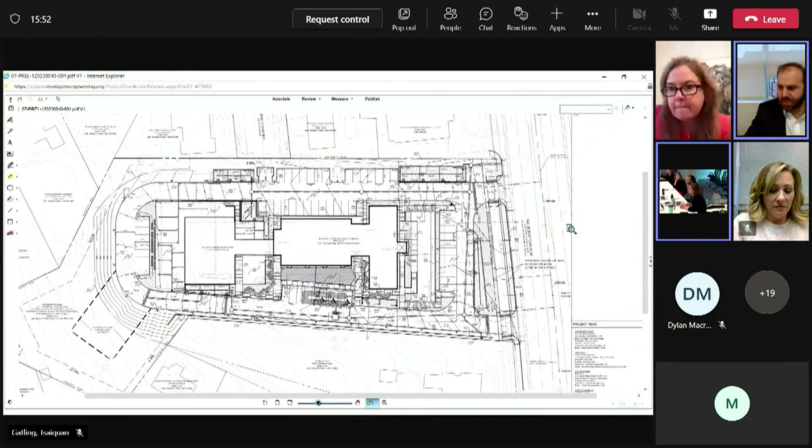I am Christina Sorrento, Chief of the Intake and Regulatory Coordination Division, and your lead reviewer is Isaiquan Gatling. The purpose of this meeting is for the applicant to ask any questions based upon the comments received last week. I'll ask Saquon to highlight the major issues, then turn it over to you for your meeting. This meeting is being recorded and live streamed.

Go right ahead, Saquon. Thank you, everyone. Isaiquan Gatling here, your lead reviewer for the Diener School Preliminary Plan. Just to lay out some key comments: there were scheduling concerns to make sure we have everything in line with the conditional use, which I can discuss near the end of the meeting when we get to schedule and resubmittal dates. Another general comment is that we need to pursue abandonment of the special exception for the existing use on site.

Getting into the planning comments, there were comments regarding the potential phasing and how we can come to agreement to work with that constraint you have. There were also transportation planning comments regarding the master plan green corridor and pedestrian safety, as well as ADA compliance and pedestrian level comfort concerns relating to cost estimates and things of that nature.

We also had comments regarding showing street lamps on the site right of way. Environmentally, there were comments for clarification regarding landscape plans and forest conservation plans. From outside agencies, we had comments from DOT regarding queuing and congestion, making sure we study those as well. There were also SHA comments regarding bike lanes and storm drain connections. That's a general overview, but we can get into those details as we discuss today. I'd like to open it up to you guys.

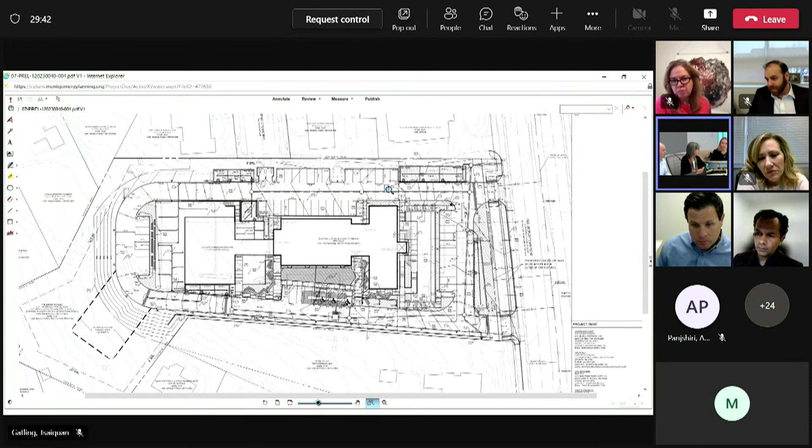That is it. Would I be able to share my screen? Sure, if you join the meeting, but mute your computer. Okay, if I could do that real quick, then I've got a few.

While you're pulling that up, in the conditional use package we included a phase 1 drawing. We did not include that in the preliminary plan, thinking the preliminary plan was just showing the full build out of the campus, but we can certainly add that to the preliminary plan set and bring it up if needed.

In looking at the phase 1 and phase 2 drawings, I think it was noted in the comments that there was a lot of changes being proposed in the front of the school. So some of the sketches we were proposing were illustrating some ways in which that change can be more incremental.

Where the loop is currently, as can be seen on the image on the right, you're showing some bus drop-off spaces in phase 1. We think that's okay because you have secured gates towards the back of the property where some car parking spaces are. But we were simply suggesting that maybe those bus drop-off spaces can be more like parallel drop-off spaces as opposed to head-in or back-in drop-off spaces as shown on the phase 1 drawing. This would limit the amount of pavement you would need.

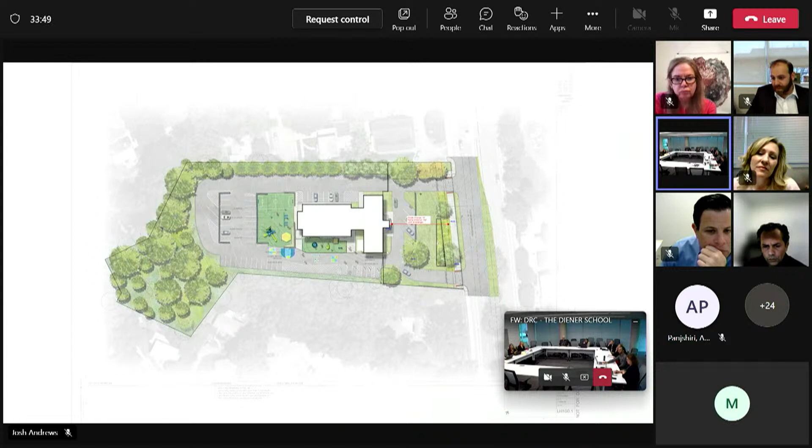To be honest, when we've looked at the ADA access from a ramp standpoint, in this current scenario, we have a real challenge of doing the ramping and having it be in the way of what we planned for phase 2.

We've spoken - let me go to phase 2. Remind me what the enrollment is that you have for phase 1. Currently there are... you split it, 72 students, and then the maximum we're using for traffic purposes is 120. Okay, the maximum the school actually expects is 100.

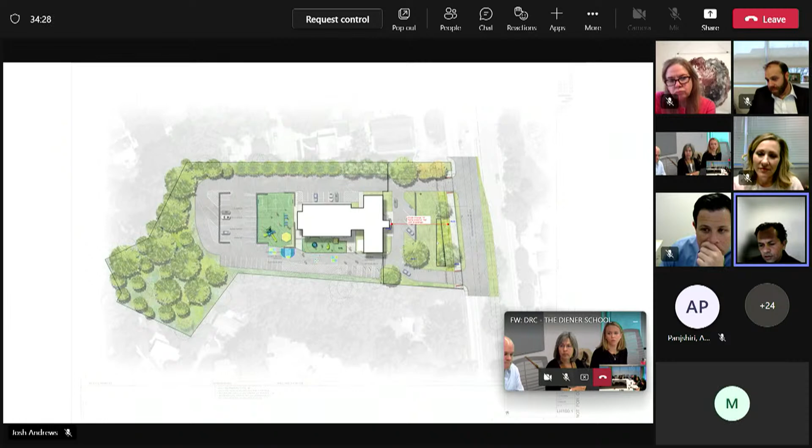Is there an existing conditions aerial that could be pulled up? Because this image shows a lot more parking in the front than what's being shown on the drawing, and I think you're maybe adjusting some things, maybe not all things - it'll be helpful to see that. That's right, maybe you can see right here.

Yeah, that's right. Several of the improvements we were including as part of phase 1 in the right of way was what was being shown. So we were trying to do what was required to meet the criteria for the county, but not going beyond that for this initial phase.

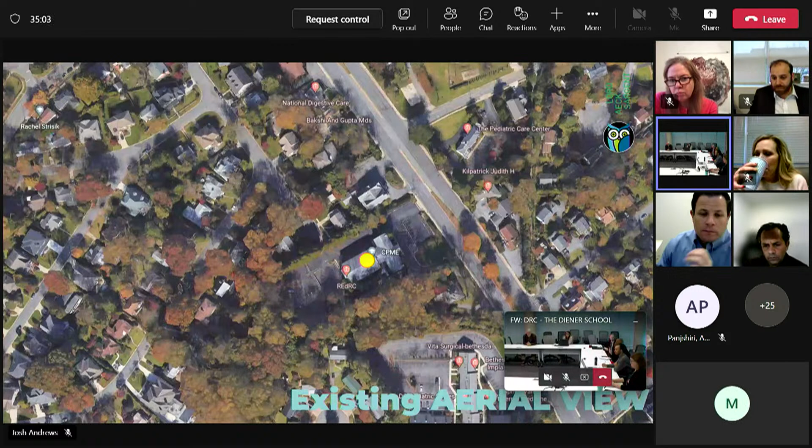Taking out the lower - yeah, in order to put in that side path you see there, effectively we need to grade back and eliminate that first row of parking that's there today. So that's why that all disappears. It's all grading and so forth to accommodate the frontage improvements.

Our only comment on this phase 1 condition would be, do we really need those parking spaces that you are leaving in the front? Could the buses simply use that loop to drop off people? Or cars could use that loop to drop off people in more of a parallel parking situation. So most of the parking, even in phase one, is really limited to the back of the school.

I'm told those are not intended to be bus spaces. Those are spaces for visitors. So buses aren't going to drop off in the same loop with everybody else, right, Kate? No, the buses will use that front loop for drop off, and part of the reason is really to just facilitate queuing.

We understand that we're on Old Georgetown and we can't have queuing on Old Georgetown. So it's to have those two areas of drop off, one separating the buses and one separating the vehicles. So you're suggesting the cars would park in the angled spaces and the buses would drop off in a parallel configuration? Yes, and the buses are not stored on campus. So they drop off and then leave.

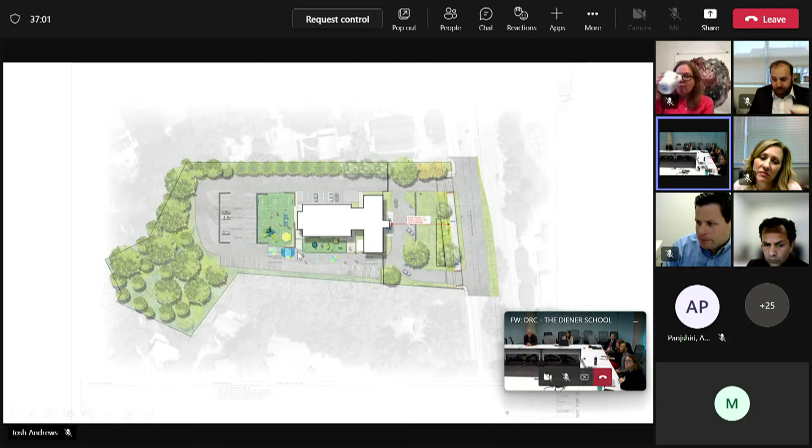Here is where our conversations have gone in terms of phase two that we're showing here. There was a lot of concern around the outdoor space that can be secured, that teachers can and parents can feel comfortable with the students being somewhere. This is an interesting property because you come in at the entry level to this building at the mid floor. So the entry to this building is at that center floor level.

So right now, what we have is the outdoor play area, even in phase one and then in phase two, it's all starting from that elevation and moving on from there to be able to deal with it from a security standpoint. What this was showing, Atul, was looking at the notion of having this raised zone that's roughly at the same elevation as the entry floor, maybe a little bit lower because we've got some ramp to get in there, but that this could be contained so you could have teachers out there watching, but they're closer to the building.

There's no interaction with potential traffic. You're not having to go across a drive aisle or be close to a busy street. So that's what the strategy was there, to be able to provide as much real estate as possible - and there's not a lot - of outdoor space that could be accomplished.

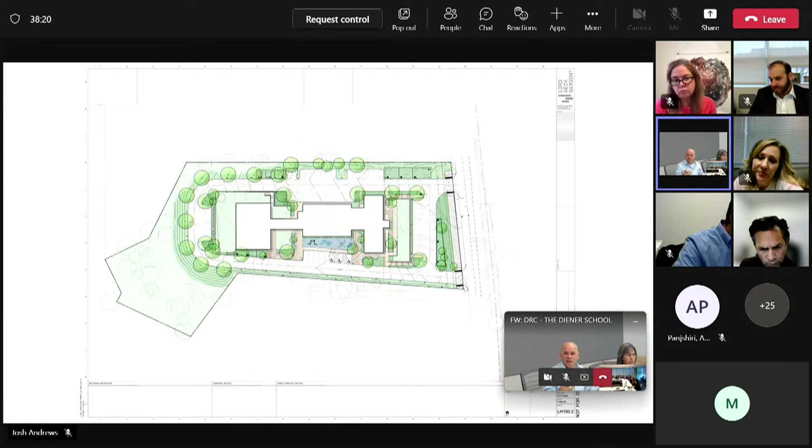The way I was understanding that, if this green area - and I'll zoom in a little bit more - if this area starts to move out into this zone more, I think the school's probably just not going to use it because they've got to go across a drive aisle that is still in the public realm, versus what's in the private realm of the school that they can contain. So that's one of the things we've been trying to look at relative to thinking about the phase.

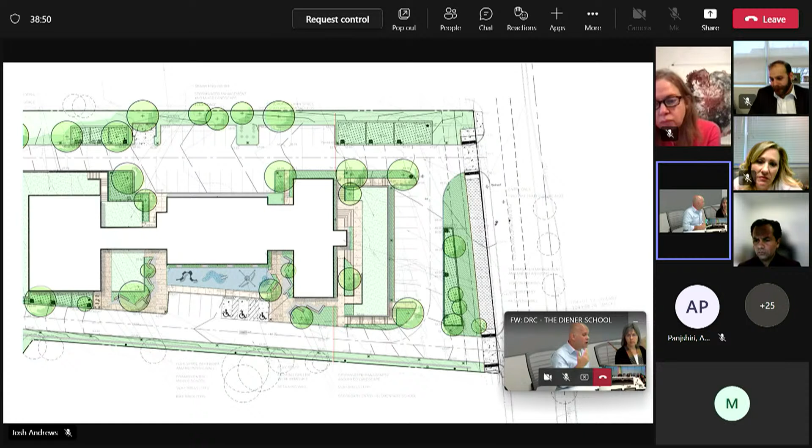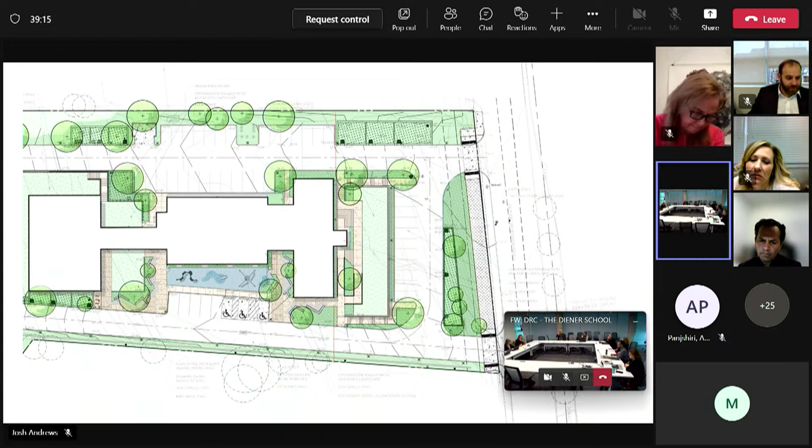I think if you take it up a level higher, get out of the detail of it all, what we're trying to say here is in the CR zone, we do not want a parking lot facing the street. So right here, you're having a parking lot face onto the street. The diagrams that we showed had parking sort of off to the side, so the parking would be on the side rather than in the front, facing the street. That's kind of the big overarching comment.

And then if you get down into the detail, the idea was if you have a drive-through, because we're assuming you're going to have enough parking everywhere else, if you put it to the sides. That may not be a correct assumption. But I think the number of spaces you are showing in your phase two, we suggest you could probably find other locations for that parking.

So if you take those assumptions, the idea is that this plaza, this drive-through drop-off for the bus plaza, could potentially be something used after hours, after bus drop-off. It could be closed off, contained, a space that's multi-use, not just for buses but for something else. So that was kind of the idea.

And I think even if you're talking about that lower ramp topic, that's going to be a big problem, I would think. Just one point of clarification, the property is actually zoned R60, not CR. That's where we have the conditional use for this one.

No, thank you for that. And I think even in this drawing, we are trying to find solutions that achieve what we are hoping to get, which is a school that has a really nice presence on a major street, and also accommodates the very specific needs of this type of use.

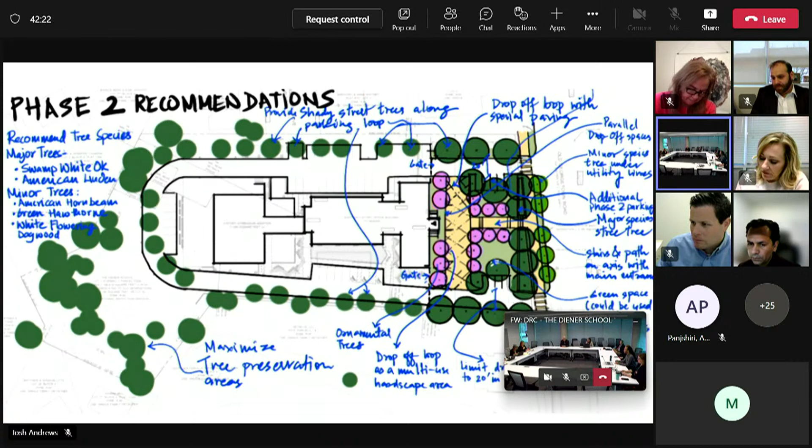I have one quick question I want to make sure to ask before we leave today, which is there was one comment about a street light. We're assuming that's adding a cobra light head to an existing pole. Is that correct? Katie and I can also chat about this more. It may be something that I misunderstood with the TIS.

So we have standards for spacing of street lamps, and it looks like we have a deficient spacing where it's too far apart, so it would land on the site. This is one of those weird things with the LATR where we're finding this through an off-site review. However, if the place where it needs to land is on site, it doesn't count as an off-site mitigation, and it's something you need to do. So we can figure that out, and I think that's a conversation with Katie and Pat. But unfortunately, you don't get to count that towards the proportionality guide.

No, I wasn't asking that. I was just wondering, we thought that there was an existing pole. If there's an existing pole and that works, fantastic. But if there isn't, then we've got to install one where there isn't one. Yeah, I think we'll work that out. I think it's on the pole, or we can put it on the pole. Great, that would be great.

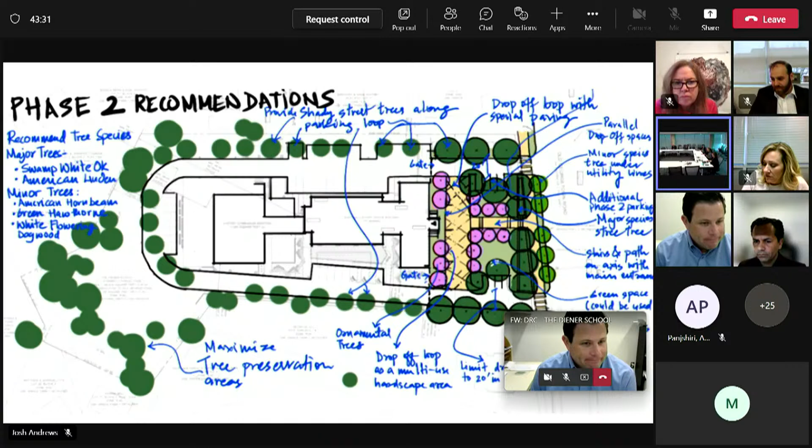Real quick, just in advance of our meeting next week, I'll show you this real quick. This is not a design per se, but this is just showing quantity of ramping.

Understanding how this site presents is very important. Also, as a green corridor, which Old Georgetown Road is, how we want to frame that and accentuate it with planting areas and trees is very important. So we'll give some thought to this and come to the meeting next week with those constraints in mind.

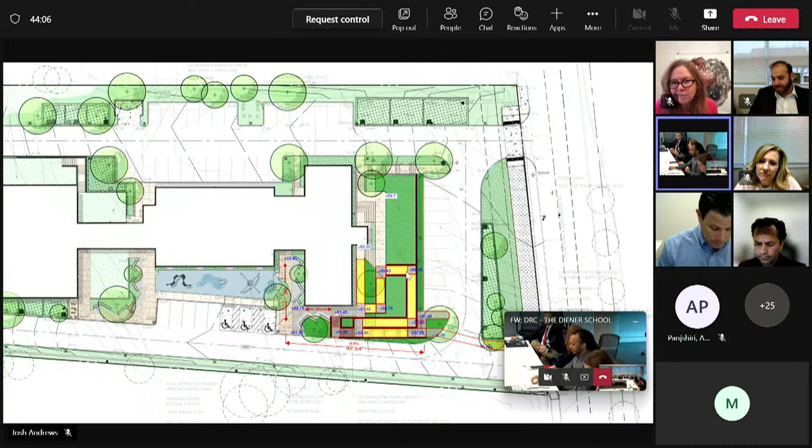Thank you, appreciate it. Okay, anybody have anything else they want to raise today? Folks participating virtually? Nope, okay. Staff, anything you want to add? Is it just design then for next week?

I think maybe transportation too, because we didn't touch on transportation today, and we're waiting for the rest of the SHA comments. And frontage improvements kind of overlaps with that transportation design, so we do need to talk about the frontage improvements and exactly what.

What's really the minimum that we can do in phase one to try and help this school actually get a new home. You guys, I'm sure, have encountered this private school phenomenon before. It's really tough for the small schools. I guess it's not that easy for big schools, but for small schools with a small budget, it's really hard.

Well, I think from our perspective, Pat—one of the, Pat, not Francois, I was looking at Patrick, I'm sorry. It's okay, you look a lot alike. Yes, I'm so sorry.

We are looking at what the conditional use requirements are to get you through that process, and then what triggers there are at subdivision to make sure that whatever the requirements are, we have the ability to make sure those go in. So give some thought to that.

We're definitely giving some thought to what those triggers might be, and kind of what we can do, and maybe what we physically can't do, or what we can tie to specific conditions or TMAG or whatever that might be. So give it some thought—we're definitely putting some thought into that as well as to what that looks like.

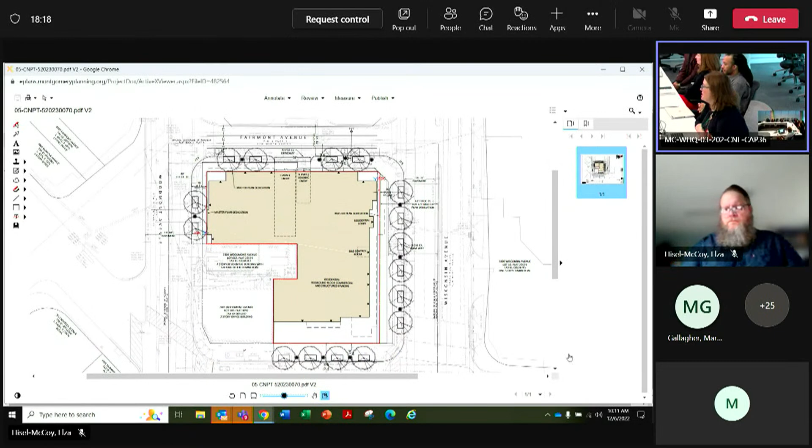Yeah, please, because we only have a short period of time for this, and I want to make sure we do everything we need to do.

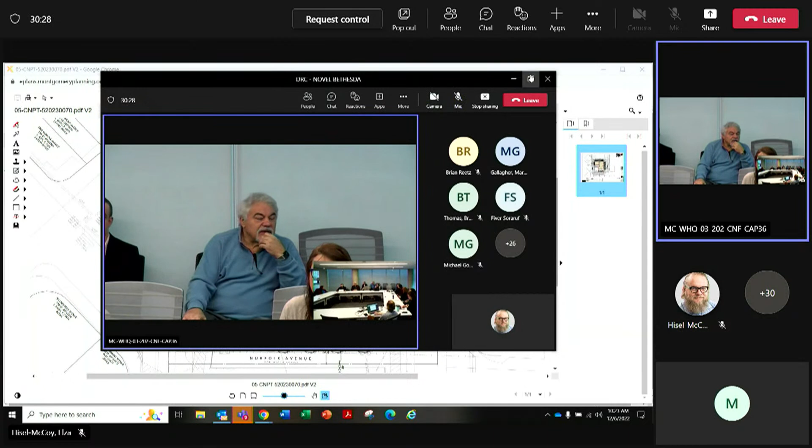Right, by the park. We were ready to go and build the building. The last drawings that Ian did for us, it was all done. It was sitting back in our 2 properties, not encroaching on any other property. And I seem to remember it had a land swap on one of those. Well, I mean, there have been many iterations.

Hi, everybody. When this project originally came in, the planning department clearly told you that this block wasn't big enough for a development that didn't include the park. So you had your development on the north side, on the property you control. And we said, this was Gwen, this was Robert, this was Paul, this was me, we cannot find sector plan conformance without a park on this block. And that's where we landed the very first time.

So I think we've been very clear about the importance of the space on this block, as Robert said, for 5 years. And again, Barbara, we can follow up, and I know that Parks has made it clear they don't need a park here, and they're not asking for that. But we are still asking. That we're in this state is disappointing. I would agree with you.

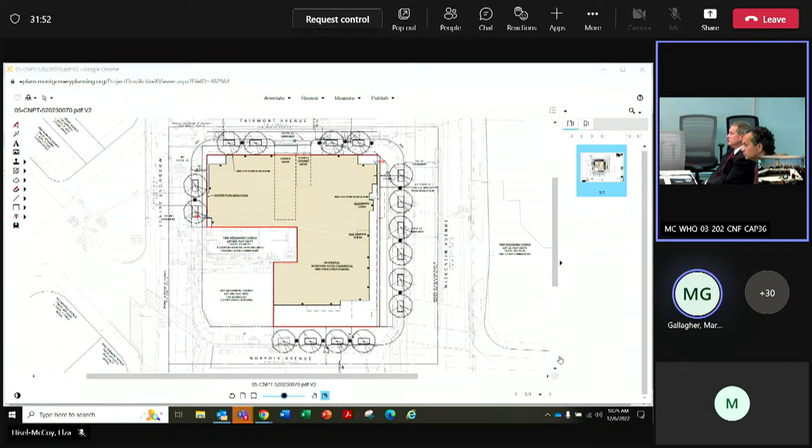Why didn't anybody speak up and tell Parks? We've been speaking up for 5 years, Barbara. Well, not to us. That's not the case, we've been coming in with these plans and you knew we were proceeding. And this is the first time you've come in with a plan that incorporates the entirety of what you're showing here today. Because you want to go to speed to market and you want to incorporate all 3 concurrent plans.

So we said you've got to come in with a concept plan that shows us what land you're controlling, how you're going to amend the plan that you originally submitted that hasn't been accepted yet. Are you prepared to give us that land at no value? Then we'll do your park. I mean, that's what we said previously, and the decision was no.

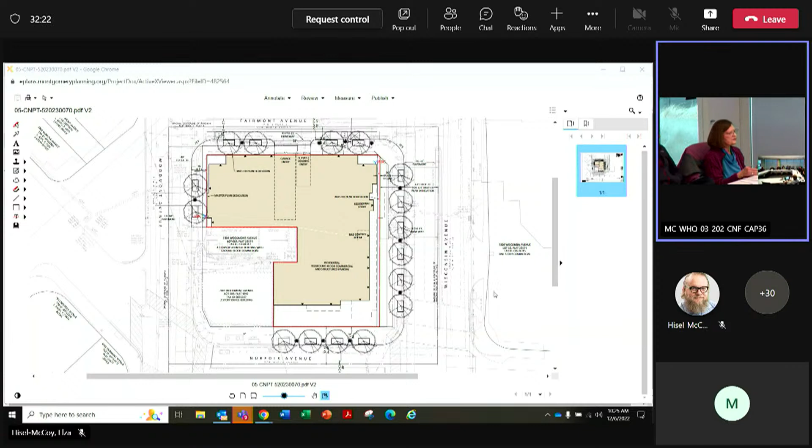And we designed and redesigned, came in, we showed, we even designed the park. Yeah, we designed the park.

Ian designed the park, and you guys liked it. I'm gonna have to turn it over to Parks on some end because planning doesn't own the building here. Parks owns the building, and this is theirs to sell.

I walked into this meeting today because we were gonna have comments here today. You open the door to have this conversation. We're having a conversation, and if we need to follow up with Parks in terms of getting back to you, you can't be told two different things. We're just going over the same ground. If Parks wants to say something, fine, but sure.

At this point, you need to get your act together. And I think, truly, I don't mean that to be disrespectful, but if you were in our position after all this, you would say the same thing. What is going on? That means getting your act together and speaking with one voice. So that's what we're asking you to do, with respect.

Robert, don't forget the most important part of this project is 25% MPDUs, maybe more. That's why we agreed to go concurrently. That's what we're trying to deliver to the people in Bethesda that they really need. A lot of families don't have a place to stay in Bethesda because it's so expensive and costly. That's what we're pushing, and we understand that. I mean, the sector plan's equally important to a lot of the people that went through this process, but we completely agree with you, Aris. The affordable housing is a big part of it.

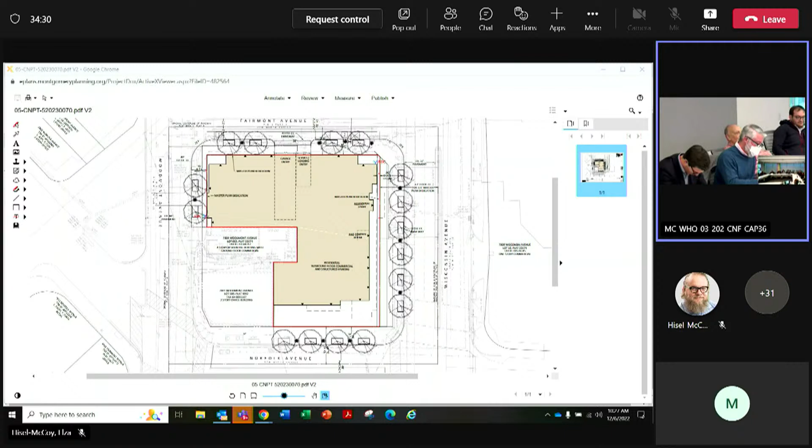Just a couple statements real quick and then a couple of questions. We filed the preliminary plan with the previous policy, the subdivision staging policy. That was before the GIP went into effect, so there shouldn't be a traffic impact study.

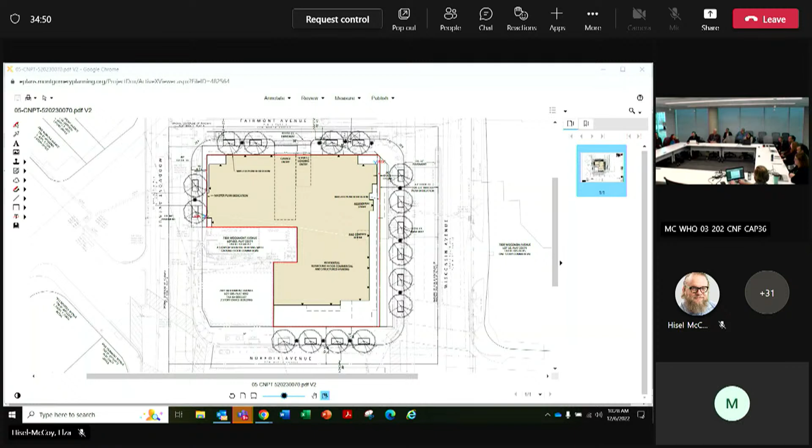We got a comment about a 10-foot PUE, and I don't know that I've ever had in downtown Bethesda a 10-foot PUE all around the frontages. We had a question or a comment to try to provide a 6-foot refuge between the garage and the loading, and essentially that just means that curb cut's going to get wider. Just didn't know if anybody picked up on that.

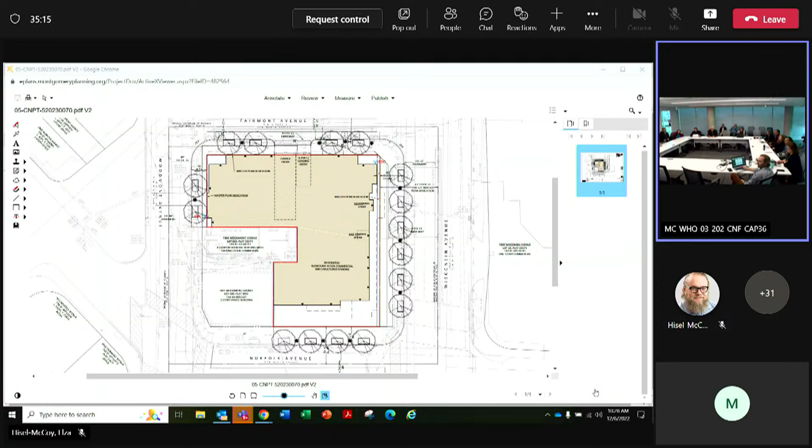Okay, thank you. The truncations - I don't know if Scott, if you've joined the meeting, if you're able to pull that plan up. We did a quick overlay to show, yes, there are zero truncations on the northwest and the southeast. The northeast is reduced, but it's no different than the extents that it was before.

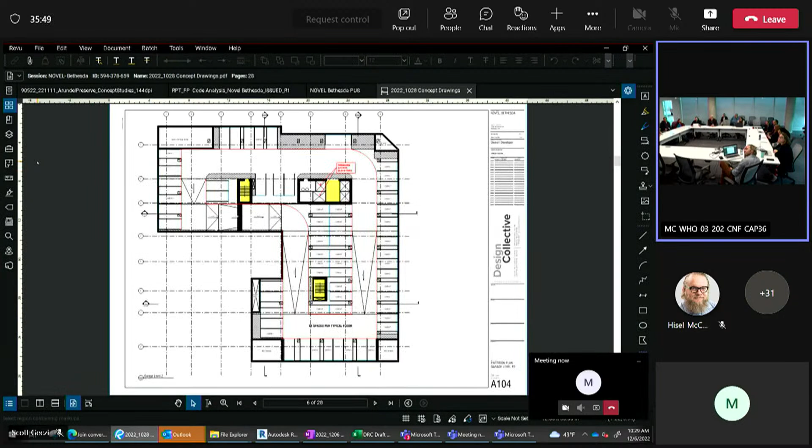Do you have the revised one that I sent? This was the one sent last night, the one this morning. No, I sent one late, just after this one, I sent another version. So I did an overlay that showed the existing buildings on top of our proposal, and essentially the proposal that we have pulls the buildings in from that. Really? 7:15, pretty sure I sent it back out. Okay, so we will be happy to share that with staff if you guys want to look at it.

In counting open space, as typical, I do show a very large amount, but I report less, and we just reported the minimum of 10%, which is what the zone requires. We had taken another look at it, which was that graphic Scott just had up, where we have, I think, about 7 feet from the right of way in on Norfolk. That will give us, with the green indicated on that plan, the 2,507 square feet for public open space.

We were a little confused on the shared street no longer being on Norfolk. It was mentioned at DAP. Not quite sure where that's written or how we can resolve that, but we know that there's a request for a double row of trees and that open view to the west to get to Veterans Park. The forest conservation exemption we know will be needed, and that should be filed shortly. We should have that approved prior to the concurrent submissions of the three.

We also got a comment on the green wall not being very sustainable in this area, so we are thinking maybe a temporary art installation against that space on the west side. Should the Connolly piece redevelop, that could be removed. So, interim, we would propose a temporary art installation.

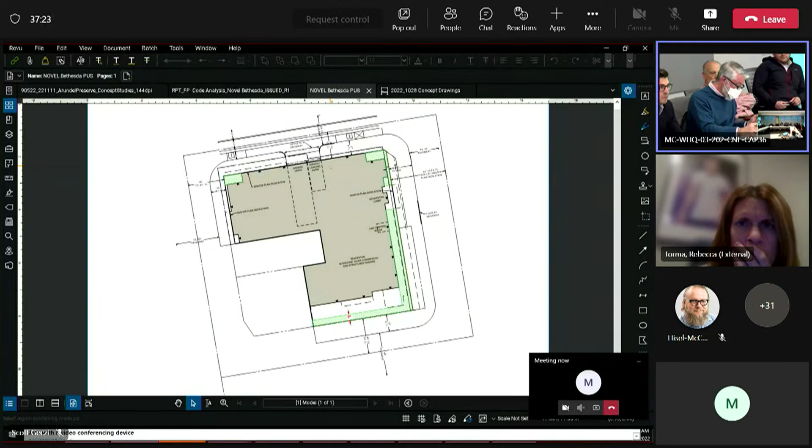There was a comment from Grace on the southwest corner of that building. I don't know, Scott, if you can point to that area on the building itself. Right up a little bit farther. There was a comment from Grace about activating the first 60 feet. I'm not quite sure what that meant. That came from the DAP, I believe.

Okay, and then we will certainly study bird safe design for the site plan submission. We have all of the comments you guys gave us, and we've started to put draft responses together that will come in with the concurrent submissions, so you can see how we've responded to the comments we got at sketch or concept.

I guess just one follow-up from what Ian said on Norfolk as a shared street. If it's not a shared street, we'd like to know what exactly type of street it is to be able to properly respond to the guidelines. So we're told now that this section of Norfolk is no longer a shared street per the guidelines. So if it's not a shared street, what type of street is it?

Yeah, the section that we're looking at trying to implement - we have separated bike lanes planned along there, and it's also still part of the canopy corridor per the design guidelines. But what typology of street is Norfolk in that segment? I believe, we'll check the guidelines, but the guidelines have it as a shared street. So that's why we're asking.

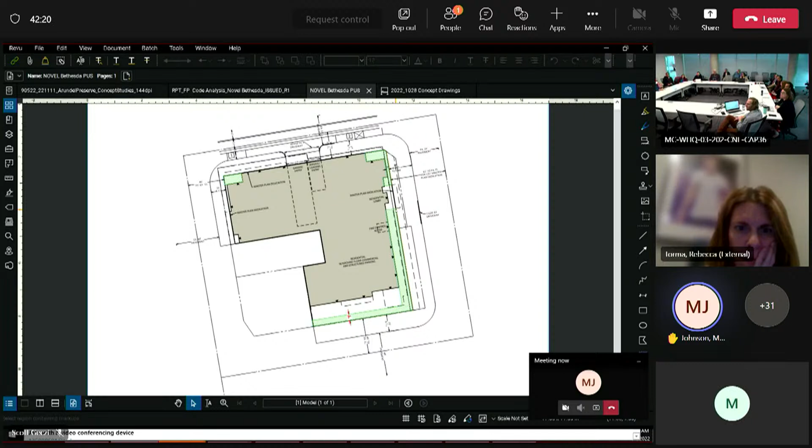I also mentioned in comments that on Woodmont Avenue, the bike master plan calls for two-way separated bike lanes. The plan didn't specify which side of the street, but it should be the west side, opposite from this site, because we have separated bike lanes on Woodmont Avenue south of Norfolk Avenue that would extend further north.

So just to follow up, on the bike lanes along Norfolk, which side of the street is that supposed to be on? Some comments said both sides, some said one side. On Norfolk it's both sides - separated bike lanes, one way, both sides. On Woodmont, he's talking about the west side.

This is Rebecca. I just want to mention that, according to Andrew, it's a downtown street. I'm sorry, I missed that. Downtown street is Norfolk. Norfolk and Fairmont.

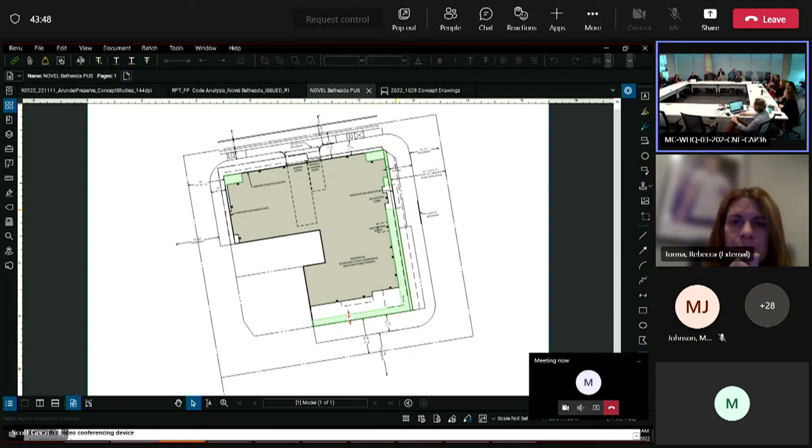Just remember, this is the Bethesda downtown guidelines, so the CSDG don't apply. And this will work. I'm just going to jump in since this slide's on the screen.

In terms of the public open space, the comment was to remove the public open space under any cantilevers. So if that dashed line is still showing a cantilever on Wisconsin Avenue, we'd like that removed and the open space focused on the Norfolk side. I assume that open space and that deck would be revised based on the DAP comments, so depending on how it looks when you submit, avoid putting open space under the cantilevers.

Grace, thank you for bringing that up - I should have mentioned that earlier. And thank you guys again for the time, we've gone over.

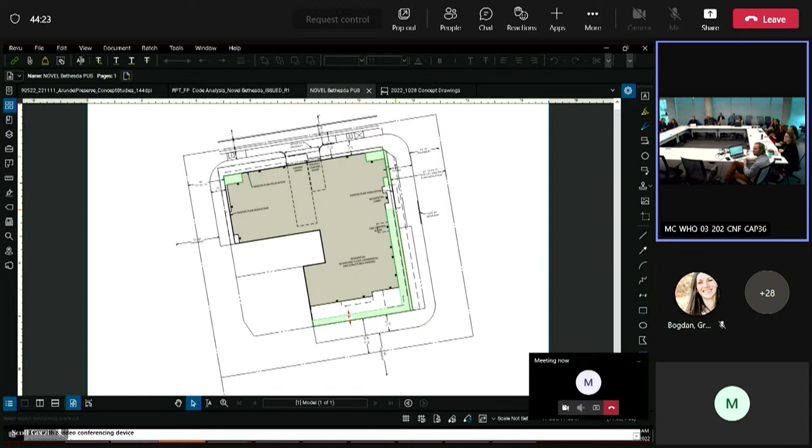The level above that is 18 feet high. I think in the past we've counted public use space underneath things that are 15 to 18 to 20 feet high, and we haven't had a comment regarding that. Well, we've had comments on that before, but that's something we can work through if needed. We've always made comments about the heights if you're proposing open space or public use space, but we've usually been able to count them within that 18 to 20 foot height.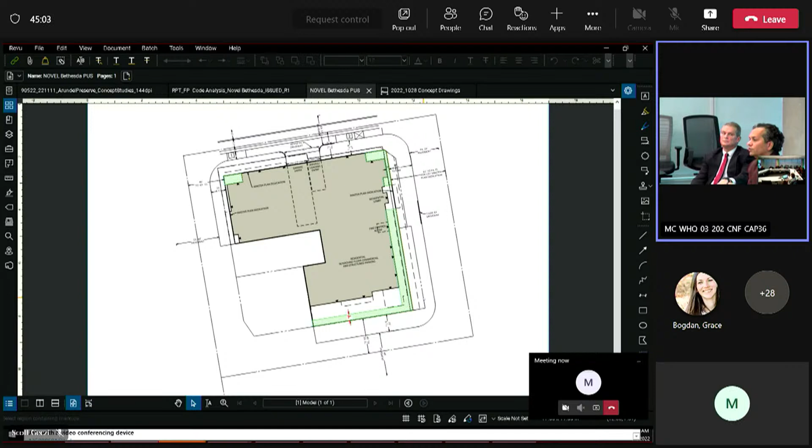It's also tied to what you heard at the DAP about the space needing to be more of a usable space than just a transitory space. Sure, so no, this is a hairball, we need to - I mean it's not half a foot wide for 300 feet long. Let's follow up with Eddie on that.

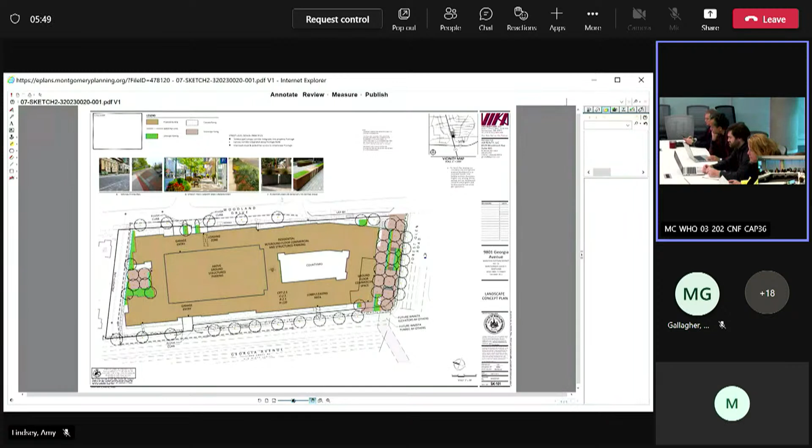All right, thank you all for joining us. I just want to say how excited we are to have this plan come in. We're excited to see some change and growth in this area. We think right next to the metro is a fantastic opportunity to get people living much closer to the metro and being able to use that.

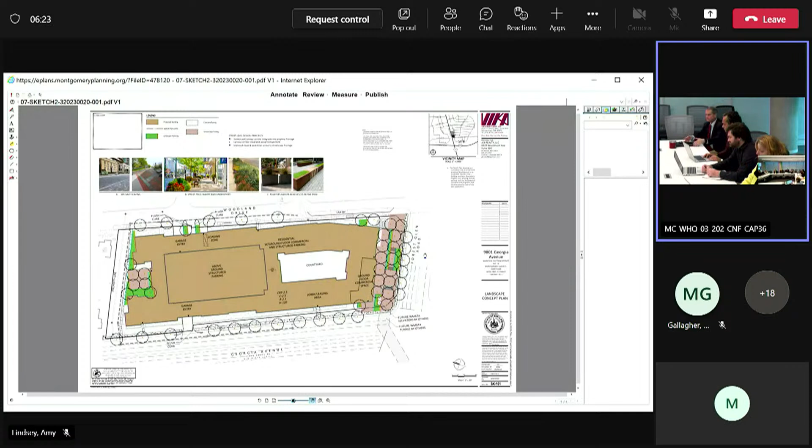That being said, we had a number of comments, all of which we think are solvable issues. One of our areas of concern has to do with the frontage along Woodland Drive. There's just a lot going on and a lot that has to fit, and we understand that.

So that's going to be an area of focus and concern. Another big area of focus for us is master plan compliance. The master plan is very specific, down to giving directions on parking and open space. There are a lot of recommendations in that master plan that we want to try to meet. We understand that there may need to be compromise, but we at least need to be headed in that direction with justification if we can't meet all of them.

So the open space, how we treat that entrance to the metro in a way that is appropriate for the context, how the building frames the space, and how we create a really safe pedestrian experience too. Those are some of our major issues, and we're happy to discuss anything with you.

Great, thank you everyone for being here and for your comments. I appreciate that intro because we have actually been working on this project with staff for over a year. We had our first meeting, Amy, you were part of it, in early December of 2021, because there are specific recommendations in the sector plan and site constraints all over the place, between SHA wanting land and having to accommodate stormwater. So we appreciate that this is a difficult nut to crack.

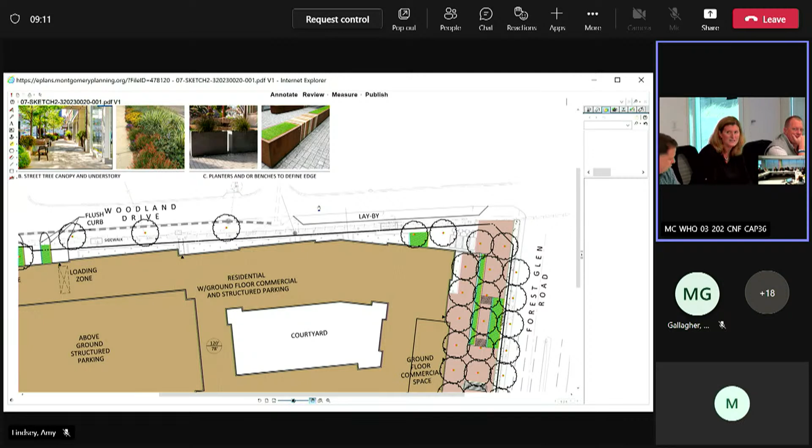We have also had meetings aside from staff with MCDOT about the tunnel construction. We're coordinating with them, and we've had numerous meetings with SHA. It looks like we finally have resolution there. For those that weren't in those meetings, we're going to accommodate some of their stormwater on site in lieu of them having a greenfields pond, which was their initial proposal. They have dropped an auxiliary lane on northbound Georgia Avenue, but they still want a turn lane on Forest Glen. So we're looking at the impacts of that turn lane.

We're also looking, there were a number of comments about the complete streets. We're looking at the impacts of those. Woodland we'll get to in a minute, but Graham, did you want to do some introductory remarks as well?

Yeah, listen, we reiterate exactly what you're saying. It's been a year and a half that we've been under contract, and longer since we started working on this thing, with copious amounts of meetings, not only with you guys, but also residents and people in the area.

Overwhelmingly, there's a lot of support for the project, which is nice to see, and we've been welcomed with open arms as far as the ideas. Some of our thoughts have merit and there's reasons for it, and then there's some thoughts that we can work with and try to work with everybody on.

When you see the site from an aerial view, it seems pretty basic, but the more you dig into it, the more complicated it becomes. It's one of those sites where Marty and I feel like we're in a video game, because every time there's a problem, you defeat it, and then there's a new boss you have to defeat. Because it's long and skinny, that's challenging from an architectural point of view, and it's very narrow, then we get pinched by power lines, and then the widening of Georgia Ave.

The grade is challenging. You probably have about 20 feet of slope in a very short distance. And then Woodland's a very wide street for what it is, and then trying to deal with the neighbors and some of their desires. So as I've met with the neighbors, there's not one solution to it. It's a solution that's going to be brought with a lot of different compromises.

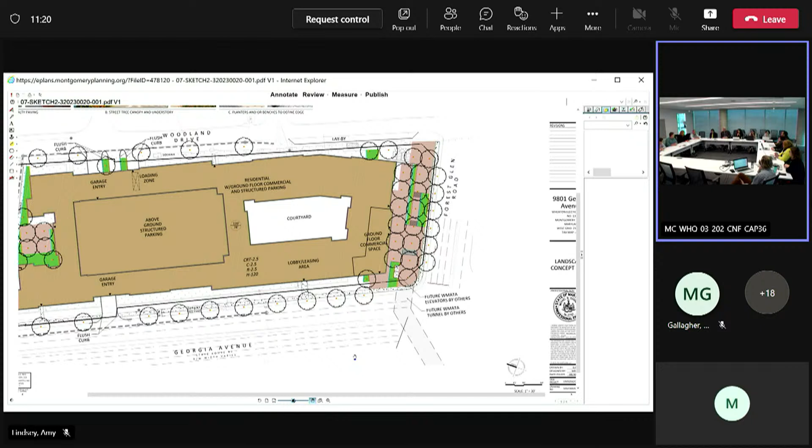So we thought a good place to start would be on Woodland Drive. In our meetings with the community, it came through clearly that they wanted that to be a greenway. Traffic calming came through loud and clear, so we've been looking at that cross section as well. I think some of the comments were somewhat contradictory about what is wanted there.

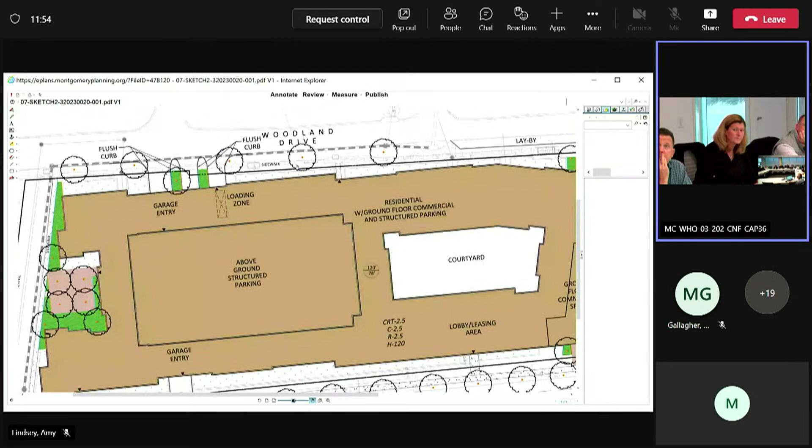So I don't know, Mike, did you want to start with what we were thinking? Well, we were expecting more of a standard street section or streetscape there, with a 6-foot sidewalk and then a more standard buffer. Just looking through the comments, it looked like DOT was looking for a buffer that was 11 to 14 feet, which seemed excessive and probably a little difficult to implement. We'd want to provide as much of a buffer as possible, but I don't know that we could achieve that.

As far as the greenway is concerned, given the width of the pavement there, we didn't know if it would make sense to add some chicanes from the greenway typology, road typology. Given the length that we have here, I don't know that it would make sense to install any kind of speed bumps, because those really are going to be more effective if they're more extensive along the road. We thought the chicanes might help with this project in particular.

I think that's most of what we were thinking, other than, of course, the lay-by. I don't know that we need to get it completely figured out at sketch plan, but the lay-by was one of the solutions we had to the master plan recommendations, and we thought it was a good compromise. But again, trying to figure out the length of it, or if it really is appropriate, is something to get a better understanding of. We did put that in there generally as a placeholder, trying to maximize the length we could achieve, but if we need to pull it back from Forest Glen, we totally understand.

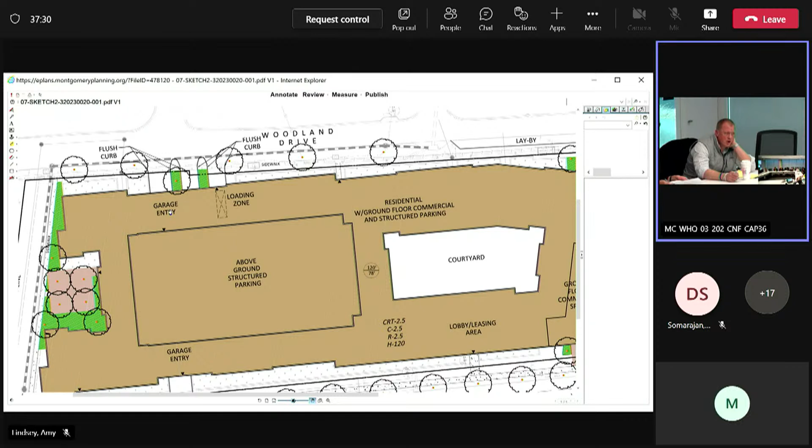And I will say that not everybody may have picked up on this - we've actually switched architects. We brought Moya in, Fede over here. We dropped the previous firm. A lot of the stuff that was getting back, scale-wise, structural-wise, we were not happy with. So Fede worked with us on a deal over in Twin Brook with SK&I. He's worked with us in the past, and I trust him to make this better. So that was the first thing.

That's all I know. So Fede, don't screw up. Second thing, so business model-wise and just sort of plan...

I like to start my meetings - and this is not for you guys - but just on what we're trying to accomplish here: we have to have a wrap as far as structured parking and a wood frame building. Financially, it just doesn't work. So what we're trying to do is stay in wood frame as much as possible because of the high side of Georgia Ave.

We can do one level of podium and that's it. Otherwise you're measuring fire off of the backside and you get forced into high-rise code real quickly. So we got to stay 6 stories on the front, and then the backside picks up the rest. So to try to maximize the density here without going high-rise, which financially would kill this project, you got to stay 6 stories on the front side and lower on the back. So looking at that, those are 2 constraints that we hit code-wise and financially right away.

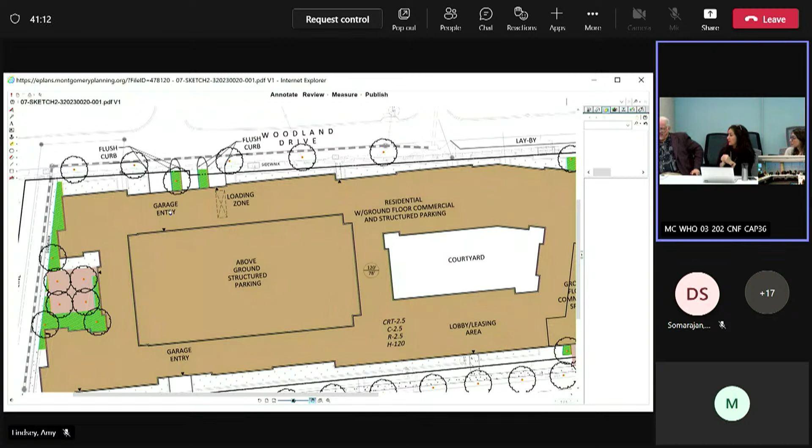Financially, you can't. Well, I know there's a balancing act on all of this, obviously, there's a lot of things. Most, or at least half, if not more than half, of your building is single-loaded corridors, so I think there's an inefficiency there as well. You have to figure out where you could put money and where you get the most value out of that money.

That was why we had suggested the other approach, because what that does is turn everything into double-loaded corridors, which I think is more efficient, and it allows potentially the breakup of the mass along Woodland Drive, which I think is a really big problem. Right now I think you're over 550 feet of length. Even if you just have a 2-foot, 3-foot base sticking out, or a different color of material, it's not enough, because you're still seeing the mass. So that needs to be addressed somehow.

So I think you've heard. Did you guys get our sketches just as a starting point? Okay, just want to make sure.

We've got to wrap up now, so I want to make certain - we've got a lot more to talk about, and I'm happy to schedule any follow-up meetings. I did want to go over real quick the schedule. Our first resubmittal date is the 16th, with a final submittal date on the 26th of December. It's a very tight schedule to make it to the planning board on February 9th. I just want to make certain that's out there. I can pass over copies of this.

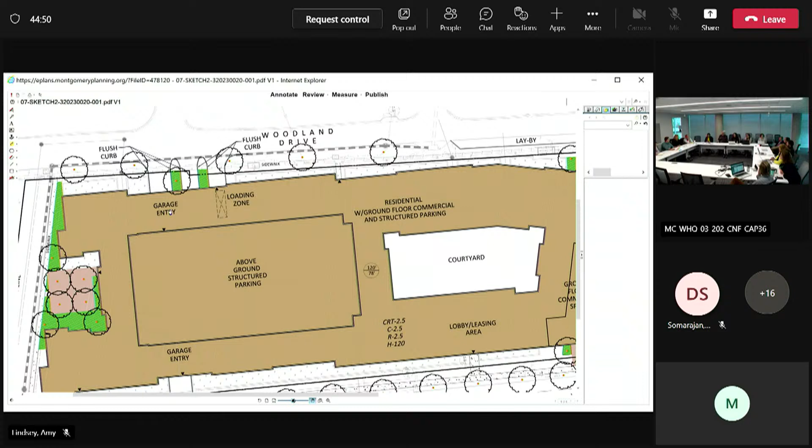What I don't want to do is limit my renter pool because we don't have enough parking. We understand that, but we also understand that most of these units will be one-person units. You might have two-bedroom units, but most of it will be mostly one-person units. And one more stop up the metro line, you're right under probably the largest Safeway we have in the county. So we hope you consider as few parking spaces as possible, whatever is reasonable. This is an ideal space for people who don't have a car to live, because they can hop right on a train.

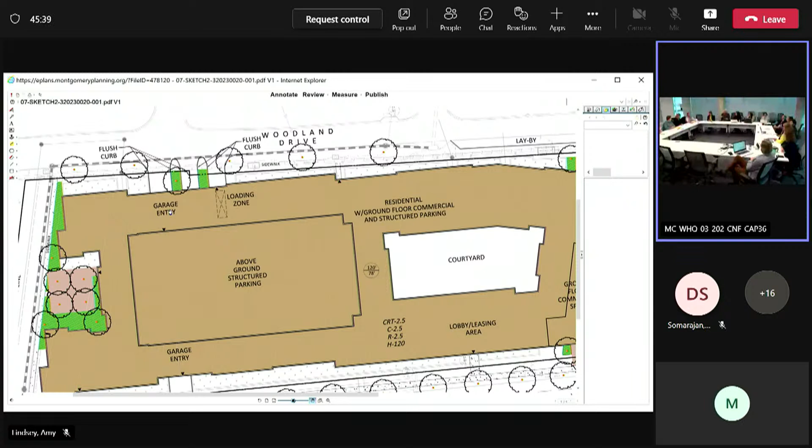No offense to that statement, we did one over in Twin Brook and we parked it at 1-4 and it was full. Twin Brook has a Safeway across the street and has the metro right on top of there. Montgomery County is forward thinking on this, and I give you guys credit on that. In Fairfax, we're at 1.5-1.6 on top of the metro. We're trying to balance all of that right now in the data we're getting from our projects.

The thing is, if residents have a car and don't have space to park, they will flood the neighborhood. It's not going to go well with the neighbors. It's also a neighborhood problem, making sure we have enough parking, and one of their major comments has been, make sure you're parked.

So we need to wrap up, but what I want to ask is, do you have all the information you need to make your resubmittal, or do you need a follow-up meeting? Because we have the work session. Schedule it, and then if we can wrap things up, if we can get one on the books, that would be good. It's going to be a race to see how much we can get done this week to make that meeting productive.

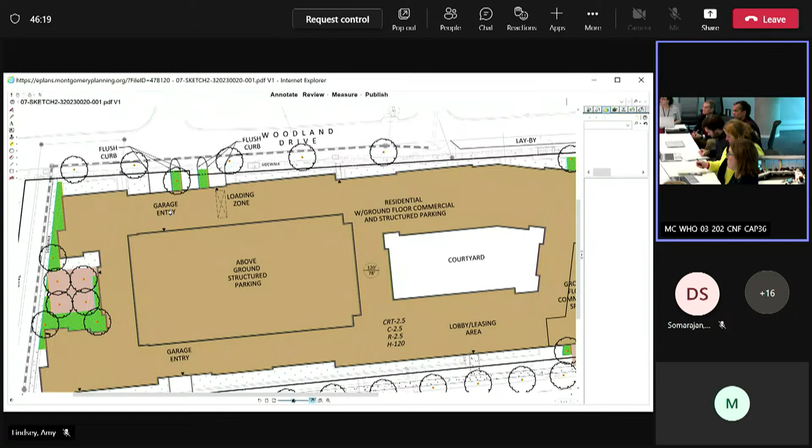Okay, so you would like to be on for the work session next week? Yes. Great, what issues would you want to discuss? Because I need to know who needs to be in the meeting. Woodland, right? Yeah, so DOT. Can we brainstorm after and just email you? Yes, but I need to know by tomorrow.

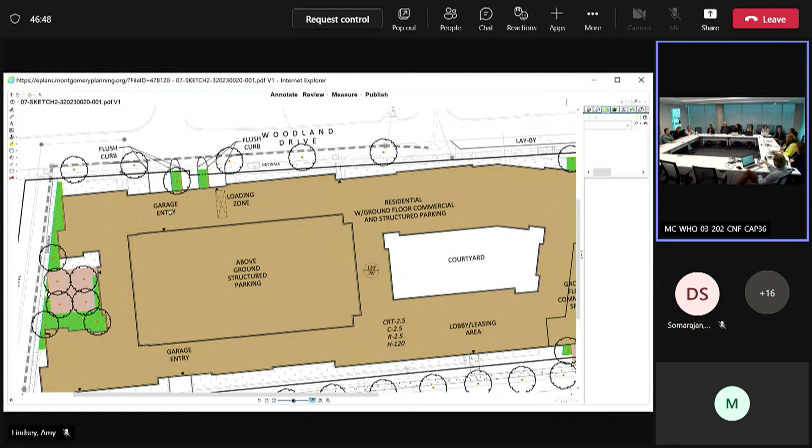That doesn't mean we can't continue working, it's just for that. Understood, the placeholder that we have. Yeah, that's great, which I love. Yeah, that's awesome. My gosh, thank you. Yes, we're happy to be the first ones to be able to do that.

Eris first, Eris is always first. Eris doesn't get to go because this is a concept. Okay, alright, thank you everybody, thank you all very much.

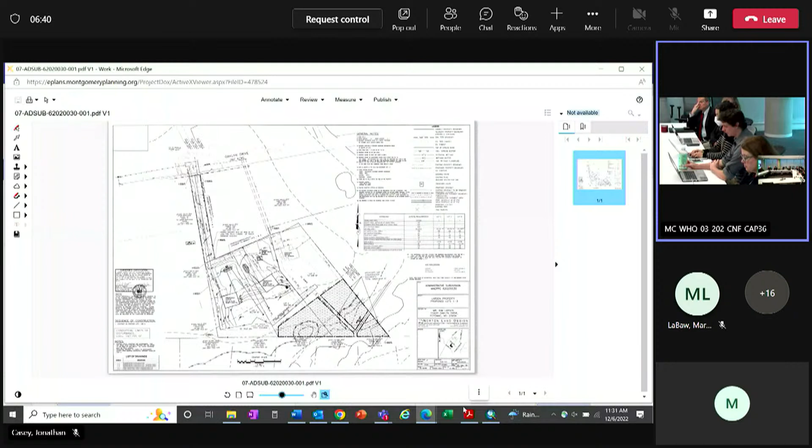So the applicant is proposing 2 flag lots and 1 lot without frontage, all of which require additional findings to be made by the board. Those are outlined in the subregs. I think the applicant's going to want to discuss that a little bit in more detail. But Mary Jo, the environmental reviewer, did provide some comments on the forest conservation areas in the back. I think those are pretty straightforward, but if you have any specific questions, she's available.

So I'll leave it up to you. I think the forest conservation is straightforward, I think all of the comments are pretty straightforward. There's 2 concerns that we have on there. I'm not sure if WSSC is on. Oh, hi WSSC.

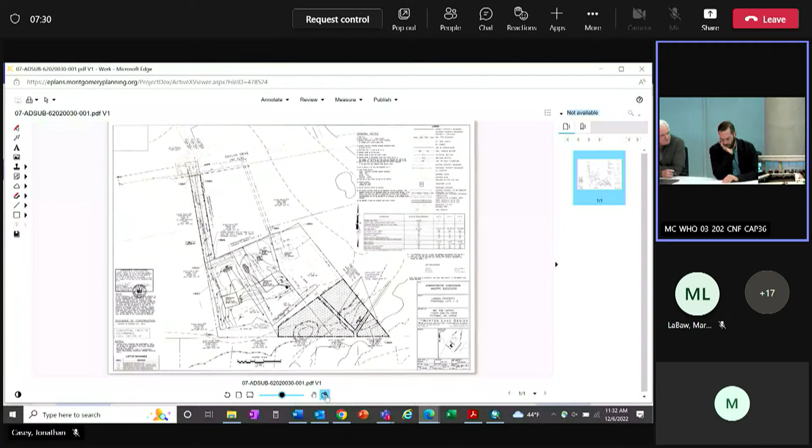Had a question about comment 45, which is test pitting the properties.

Issues regarding the fire hydrant on the property. We have a fire marshal issue because we have a common drive, and because of that we have to put the fire hydrant on site. Because of the distance from the existing fire hydrant, we had to pull the water line in and put a fire hydrant on the corner. Our idea was that fire hydrant will be private.

The way we have it right now, we have 2 water lines coming onto the property: one going to lot 1, one going to the hydrant, and then from the hydrant to lot 2. So the hydrant will be in line - an 8-inch line coming from the main out in the road to the hydrant, and from the hydrant to the house. That's how we could split it behind the fire hydrant to the 2 houses.

I don't know what WSSC wants to see, but the idea is that this is going to be private, so I think that might put the concern to rest regarding the easement and public status. Because this is what the reviewer is asking - it was not clear in the plans whether the fire hydrant will be public or private. If it's public we need an easement; if private, then it was always intended to be private. So I think we can resolve that comment pretty easily.

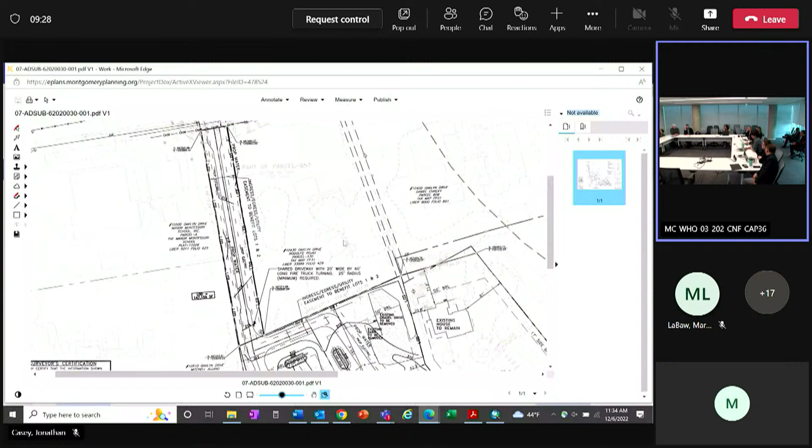Then it goes to comments 58 and 59, which relate to the findings for the lot without frontage, which is the existing lot. On the right, to the east, is the existing house where the owners currently reside. We're looking at splitting this into 3 lots as shown. The property right now is landlocked as it is - there's a portion of property where the pipe stem itself is under a different property.

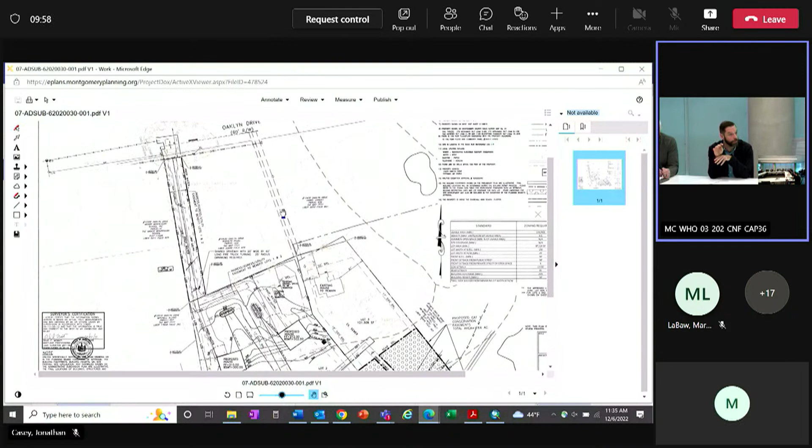Kim, did you purchase that or was that done before you? It was done a few months before we bought it. So we do have 2 separate properties here. We have 50 feet of frontage technically through that pipe stem, which is how we're looking at addressing the 2 new lots. But Kim's house right now - the easement is the one we were planning to use for it, the existing driveway. We really did not want to change anything to do with that existing house right now.

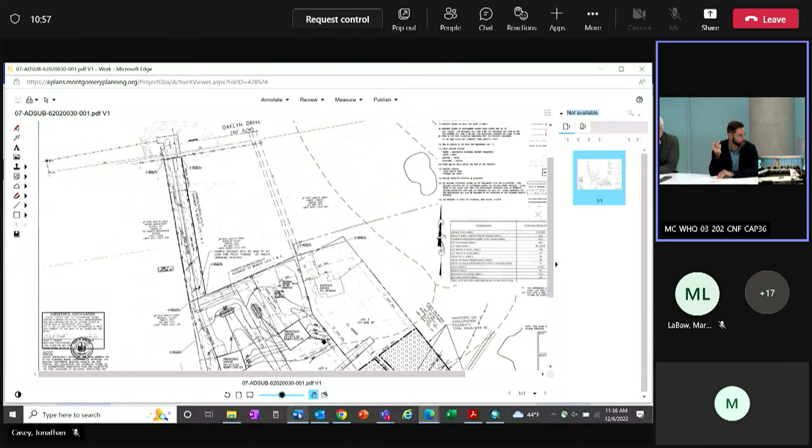So what I was trying to understand is it looks like the subdivision reviewer is saying to abandon that easement, abandon that driveway, and make the connection from the 2 flag lots that we have right now. The way we were reading the zoning, we're allowed to have 2 lots that do not have frontage. So I'd like to understand a little bit more about that, and we'd like to continue with what we have.

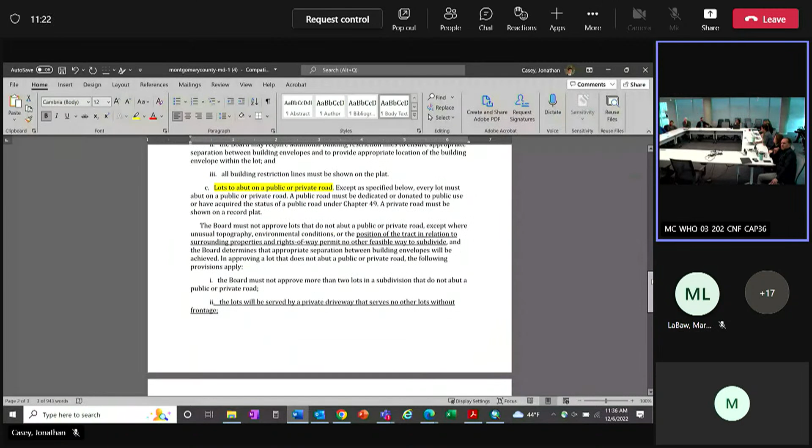Here's the language I just highlighted - I cannot read that. Lots must abut on a public or private road. All new lots must abut on a public or private road. But the issue here is the provision says all lots will be served by a private driveway that serves no other lots without frontage, when you're creating a lot without frontage.

Hypothetically, you could extend that driveway, your new proposed driveway, from the 2 new lots over to serve the existing house. I understand that is not exactly what you'd like to do. I think there might be a possibility to keep the existing driveway. I guess that's what I wanted to talk about.

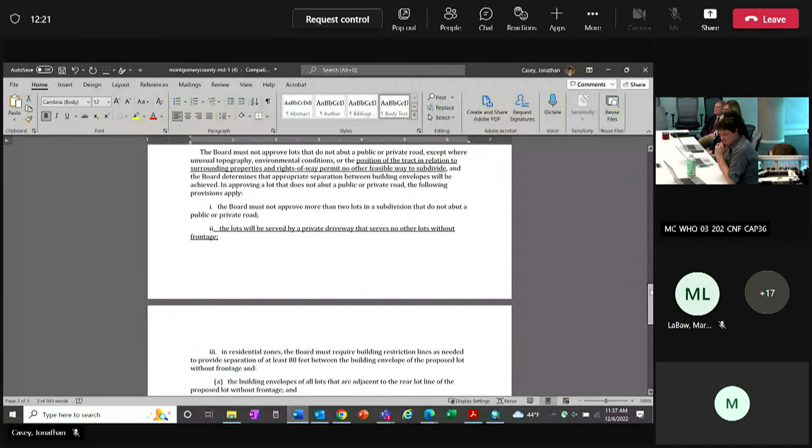Our recommendation was to consolidate access for the 3 lots you're proposing with this subdivision all on one access point, which is the one you're now proposing, with the flag lots for access. That's one comment. The separate comment had to do with a lot without frontage and the justification for that finding - that's a separate issue.

We were asking you to elaborate on those reasons for that finding to be made at the board. There are a few reasons you can use - I think topography, environmental, and the last one is the location of the lot in relationship to the surroundings.

Is that for justification to extend the driveway or justification to use the existing driveway? I think as a team, Sandra, we should discuss that first a little more. I think it's an issue that we need to resolve with the code and what you're proposing.

Okay, because if we just jump straight to that interpretation about the driveway, the other way we have to do a justification. I understand that part. I guess my concern is, can we use the existing driveway or do we have to extend? Yeah, there's an existing drive.

I just think there's a question there. I totally get the issue and understand it's flagged and we'll have to respond to that. I just think there are implications for interpreting it that way that lead to additional pavement and turnarounds and imperviousness, and there's some other things that maybe we want to think about before we say you must do this.

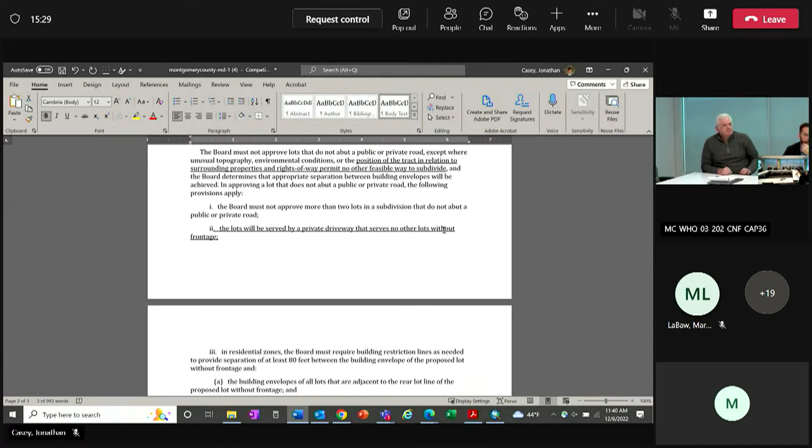I just think we need to get a little bit more organized, so our lead reviewer is out sick, obviously, so Jonathan is stepping in, and we have this comment, and I think we just need to talk as a team and really make sure we give some clear direction on what to do based on the language in the code.

Okay, all right, apologies, we don't have it right here, but it should - sure, maybe a day or two. Okay, I don't think that's the problem, I think that's really what we came down to.

The second part of your original question about justifying the lot without frontage, because that was kind of tied into that same comment, separate from the driveway issue. I believe what she's looking for is just provide additional explanation as to why the lot without frontage is justified, in relation to the tract.

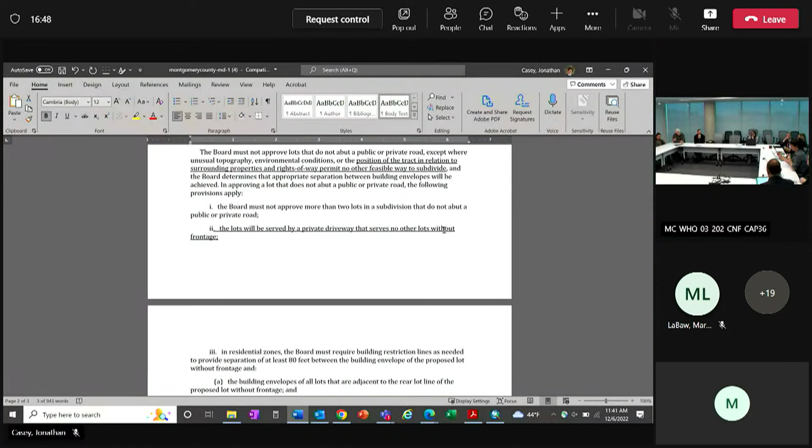I guess what I was saying is if staff said that we could potentially use the existing driveway that's out there right now, we would still have to do a justification for a lot. Either way, we have to do that justification, is what I was saying. So it really comes down to which way do we go with the driveway?

And it looks like, if I read correctly, that we do have support for the flag lots in there. I didn't read anything that says further justification for flag lots, so it sounds like it's just... Do you meet the 80-foot requirement for building envelope? We do, so we showed that.

That actually got me back to some of the environmentals. So there's lot width issues and there's setback issues for some of Mary Jo's comments about sliding the house forward too. So again, I can address that, but there are reasons why the houses are set back where they are. We do meet everything else that's required, so.

Just curious about justifying the unique topography and everything that justifies the exemption. We spelled out some of that in the application. Are there other areas that should be expanded? I can read it over, but I want to talk to Alex to see what she thought was missing, because I'm good, but I don't read minds. Sure, she can elaborate on that a little bit.

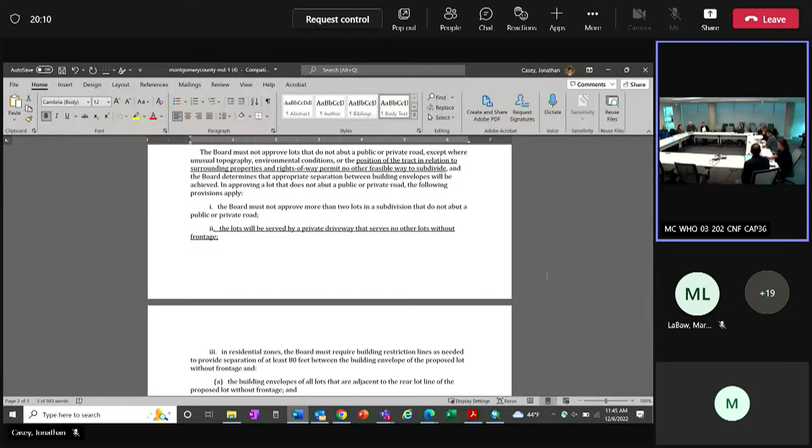We have to get all of his approval. When do they have to resubmit? They definitely have to resubmit. We're gonna have to go to the board for this because of the flag lots. I would think we'd probably have to file one extension. I don't have a lot of data points on this scenario with our new board yet, but if we were coming so early, that could result in maybe a bad discussion with them.

But why are you coming now? You still have how many days left? The first one's a director-level. As long as it's 30 days though, correct? As long as we're just thinking 30. Longer than 30? Let me go back to these comments, let me hear from you guys. If it has to go to the board, and it's more than 30, I'd rather wait until we think we actually need it. If you tell us we have to extend that driveway, I'm gonna need more time. Otherwise, we might be able to make it. Let's check back on that in a week.

What's the resubmittal time? The first resubmittal is December 20th, two weeks. The final resubmittal, which is 65 days in advance, would be January 9th. If it's as simple as it sounds, maybe you just need one resubmittal, not two. That's what you can play out once you see all the comments, and gauge how much time you'll need to make revisions. It could be that you just need one resubmittal.

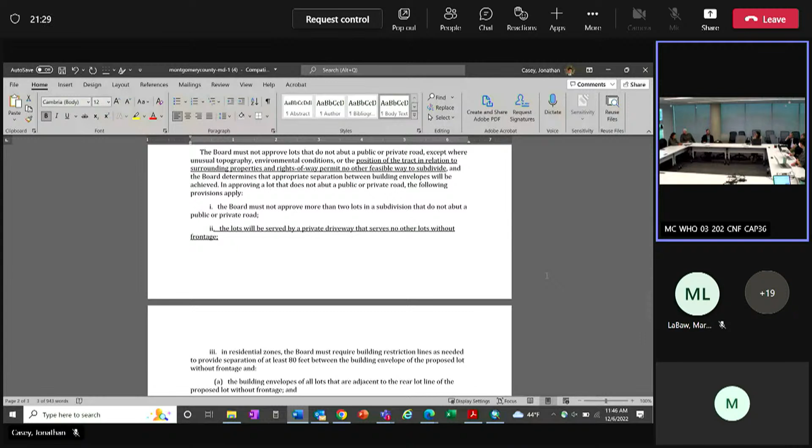I'll go back and look at this. I think once we hear back on the position of staff on that driveway, I'll have the idea. How about fire department access, where are we on that? It was approved. We uploaded the approved drawing.

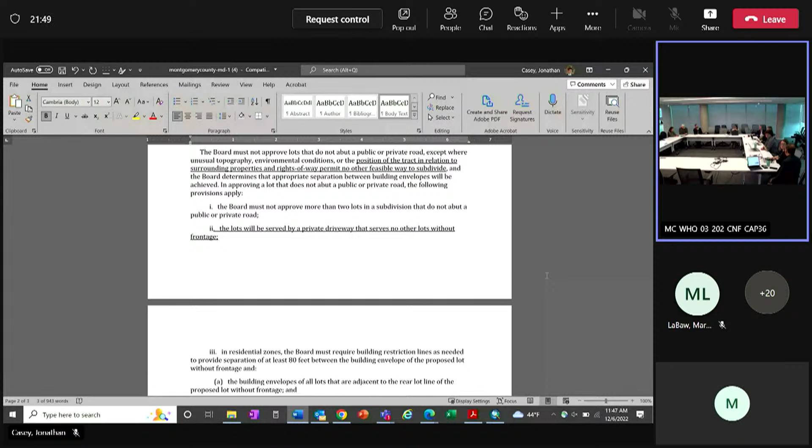Okay, so what? I don't know why she said it was not right. Sorry, where is she? Oh my gosh, she's behind me. She's everywhere. I'm watching you, I hear that. Oh my gosh, it's like you came out of nowhere.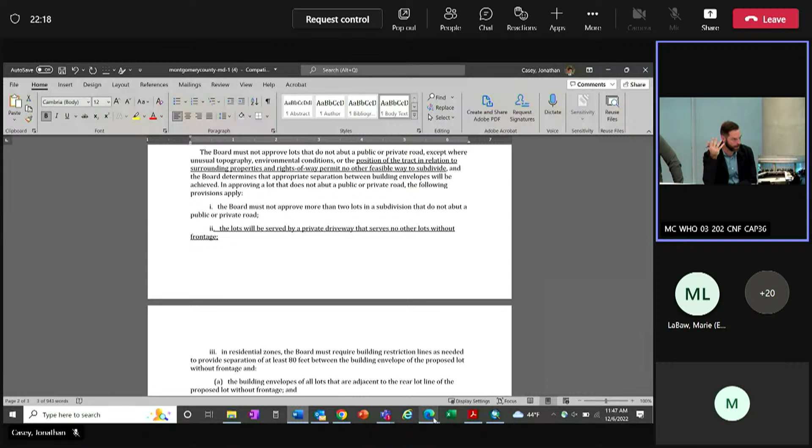We uploaded the approved drawing. I think the comment was incomplete, is what it said. I'm not sure, I have to go back and look at why it said that. Let's ask Marie, she's here.

Marie explained: anytime I deal with plans that come through the DRC after I have approved them, I tend to mark them as incomplete just to leave that opening in case something comes out of the DRC process that needs to change it. If it doesn't, the approval stands, life is good.

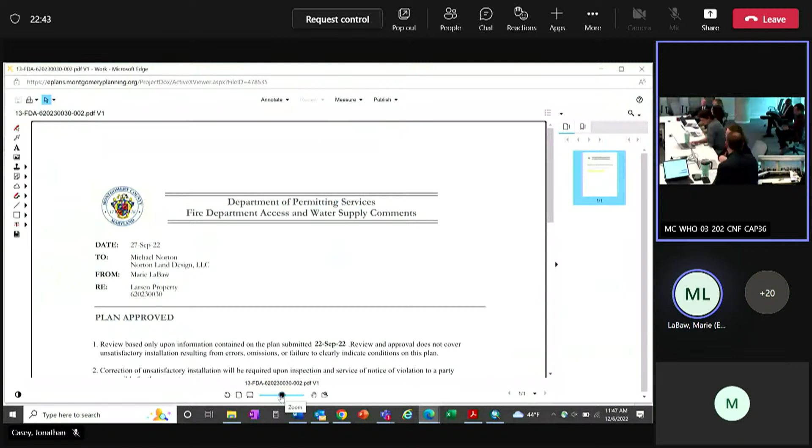Ah, gotcha, thank you. Yeah, of course. You scared me. Like right, how about from behind the curtain, Marie?

Yeah, I think that covers us. I think we meet everything else. So unless you had any other comments? No, I don't. No, thank you. So we'll look to hear back from you guys.

It is to show the sidewalk in front of the pipe stem. Yes, I think that's what I heard. All 50 feet. In most cases, we'll show that and then request the waiver later, if I remember correctly. Seems to be that course of action. It's whatever you decide, because there's no sidewalk anywhere out there. Understand, yeah, okay, I think that's all the stuff.

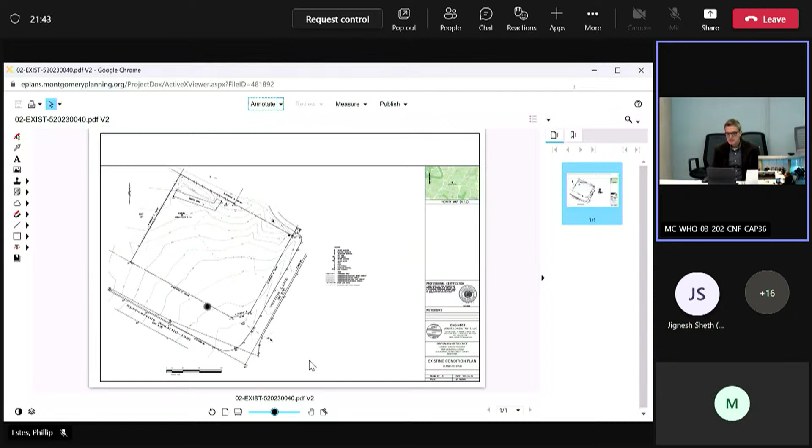So I had a plan up on the screen. This is a concept plan application for a one-lot subdivision for single-family residence. As Christina mentioned, this is an opportunity for the applicant to review comments with members of the DRC. The applicant has received the comments, and I'd like to highlight some of the major issues presented. The first one is the impervious surface limits into the Upper Paint Branch Special Protection Overlay Zone.

Phil, I'm sorry, you have the existing conditions up. Do you want to put the subdivision up? Sorry to interrupt. This one, yes, sorry.

So we have some comments regarding the impervious surface limits, other comments regarding compliance with the forest conservation law, some transportation comments, notably the provision to provide a 10-foot side path on the south side of 198, which is Spencerville Road, and also compliance with fire and rescue access. So those are the substantive issues raised, and we can jump into questions from the applicant, or we could go around with a recap of agency comments. It's up to the applicant what you would like to do.

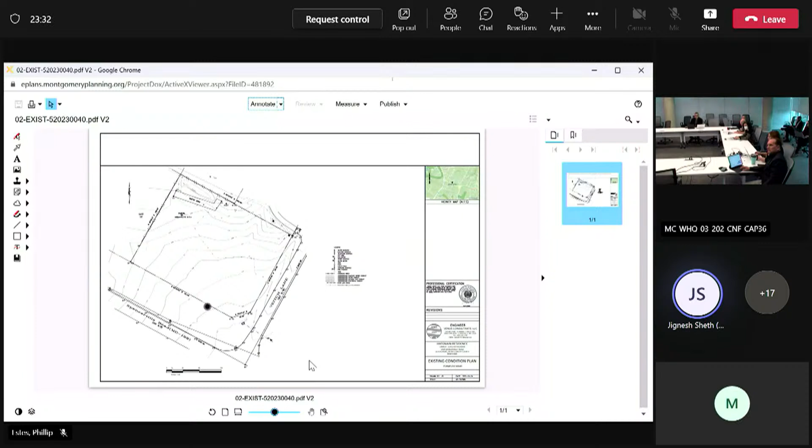No, I think we received the comments, and we're good, like we are in process of addressing the comments. Okay, do you have any questions for us? Not really. Okay, do you understand the major issues that were provided to you? Do you have any comments about being able to comply with those standards or comments?

No, I mean, so the comment is about adding a sidewalk there, or? Okay, all of the comments. Okay, well, let's just go through. I guess we can just go through and highlight comments.

We could start with environmental, the impervious surface limits. Do you want to highlight those, Doug, or do you have any questions about those? Well, this is Doug Johnson, the environmental reviewer. As you know, you're under an 8% cap for this development. Currently, with just the house and driveway shown, you're at 9%.

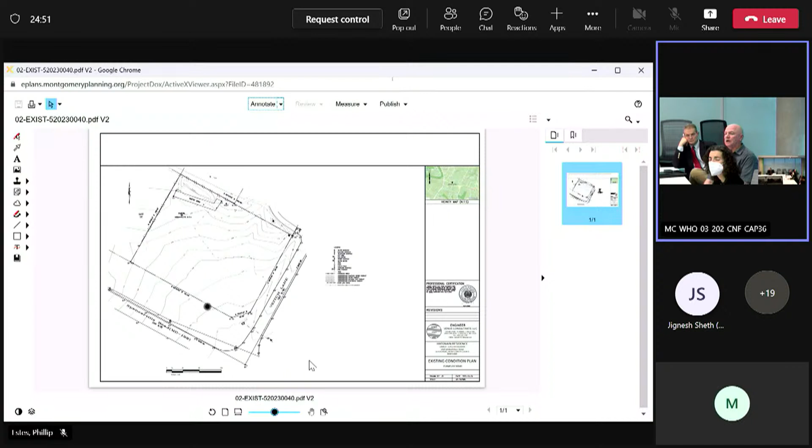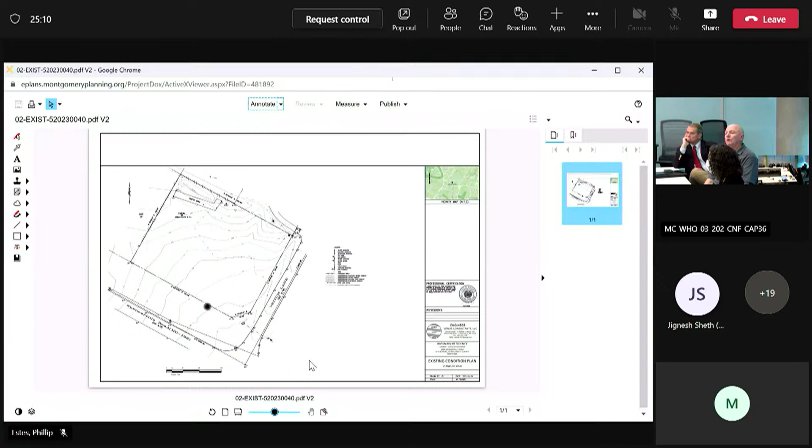What the plan is not showing are frontage improvements along Spencerville or Vitch Lane. Those will also have to be added into the impervious amount, so it's going to be a challenge to drop below that 8% cap. The other sort of, not a major comment, but what you will also have to do when you solidify the ultimate limit of disturbance, you will have to get a new forest conservation exemption for this property.

Okay, right, yeah, because the LOD will be revised, so yeah, I understand that. That's fine, okay, we can resubmit the application. And what you're talking about, adding the impervious area along the frontage improvement, that means you are talking about just a driveway apron?

Any frontage improvements required along Beach Lane or Spencerville Road will have to be added into the overall imperviousness calculation. Right now the plan's not showing any frontage improvements. Right, because we did not have the comments before about the frontage improvement. That's why it was submitted the way it is.

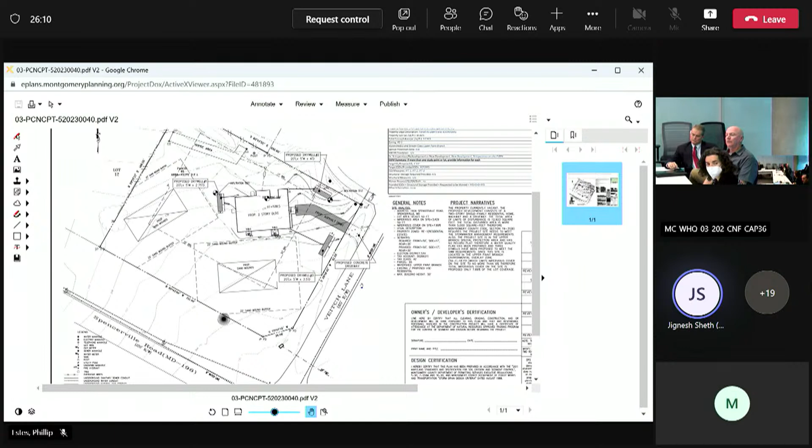But also when I had the pre-application meeting, I was told that if there is any frontage improvement, we can consider that impervious area, but also the limits of disturbance will be higher too. So the percentage below it, I don't know exactly yet, but we understand that. That's fine. So if it is not less than 8%, we will figure out another way to bring the impervious area down to 8%.

If this development application moves forward, I would like to make you aware that this will have to go to the planning board because there is a water quality plan involved. Correct, so expect that and factor it into your timeline. Yeah, that was discussed in the pre-application meeting also, so we understand that.

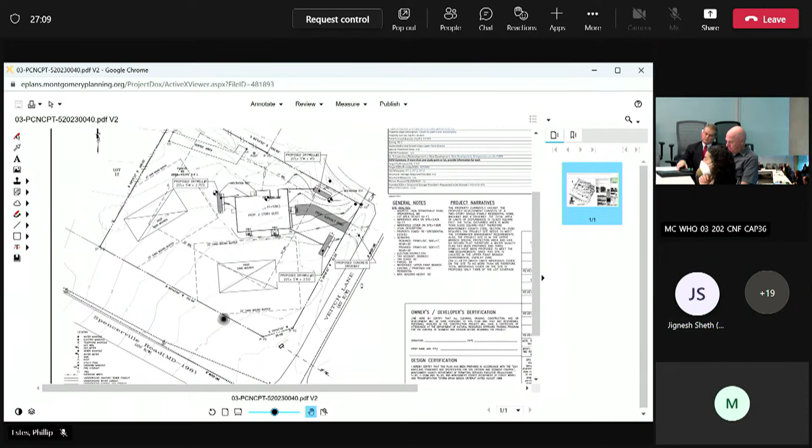While we are on this topic, we also have our transportation planner here, Brett Brown, and he can go over the frontage improvements that we are recommending as part of this application, just to make everybody aware. Can you jump in?

So as Sandra said, Brett Brown, Up County Transportation. A lot of the comments I had were mostly related to exemptions for frontage improvements currently. Right, you are located within a rural zone according to the county road code map, so you would be exempt from providing a sidewalk.

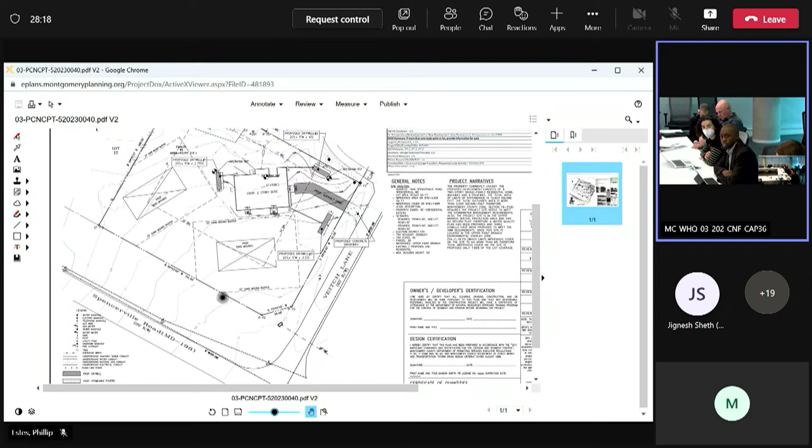I'm not sure if SHA is on the line. I know they are convening a study that would add, I believe, a 10-foot side path, but it would be on the southern end, the eastbound lanes of Spencerville Road, rather than on the side where the property fronts Spencerville Road. So in terms of that, harkening back to any impervious caps, you'd basically be exempt from providing any frontage improvements that might increase the impervious cap. Right, okay, thank you.

Okay, thank you Brett. And I think the other outstanding issue was fire and rescue access. Did you have any questions about those comments? No, I didn't see any comments on the fire rescue side.

Okay, but I think we do have Marie on the line. Marie, would you highlight your comments for the applicant? The big thing on this was that you need to locate a fire hydrant within 400 feet of your driveway. I did not see one on the plan. Right now it may not be on the plan. I don't know exactly, but we might send the surveyor out to shoot the fire hydrant if it is within 400 linear feet. We can double check and resubmit the plan.

Perfect, and we will address that comment. When you locate the hydrant and redo the plan, you'll want to email that to me directly for a faster review. Okay, thanks.

Are there any other comments or questions from the applicant? No, I had the major thing about the comment on impervious surface. Right now it seems like there is no frontage improvement required, so other areas we have already included within the limits of disturbance. So right now I'm still within the limit of 8%.

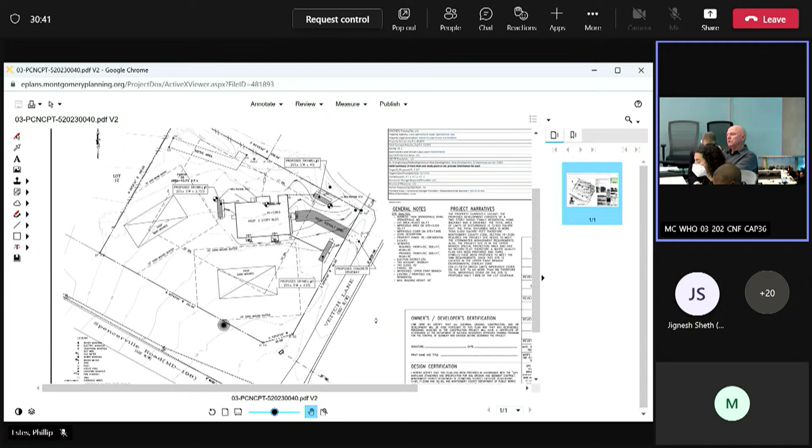This is Doug again. You are over 8% by my calculations, you are at 9%, and you're not showing the ultimate impervious surface for this property. One of my comments on the plan was to have an accurate layout of the house, including any lead walks, patios, et cetera, that are typical with homes. That would increase your imperviousness. But even as shown right now, you're at 9%.

I mean, the way we measure it, it came out to 7.87%. But I will double check, and if it is required, then we can make any adjustment, reducing the footprint of the house or whatever, we will take that action. Good, okay, but yeah, I will keep it down to 8%.

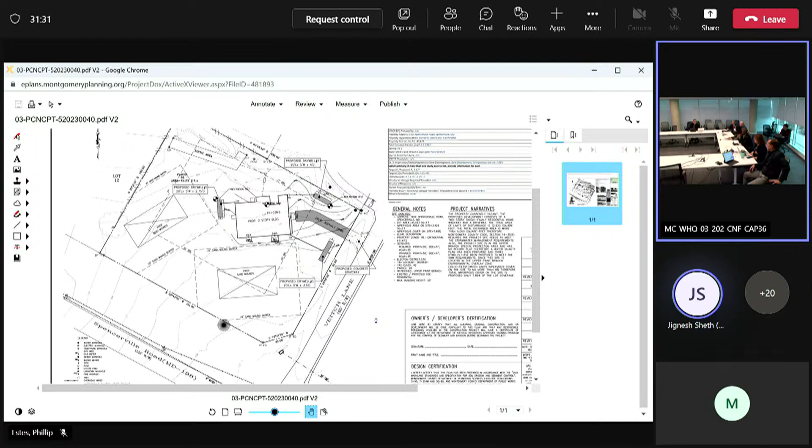So if you have no further questions or comments, the next step, if you wish to pursue this, would be to address those comments, and then we'd need to file for a preliminary plan application. Okay, and reach out if you have any other questions. Sure, thank you. Thank you.